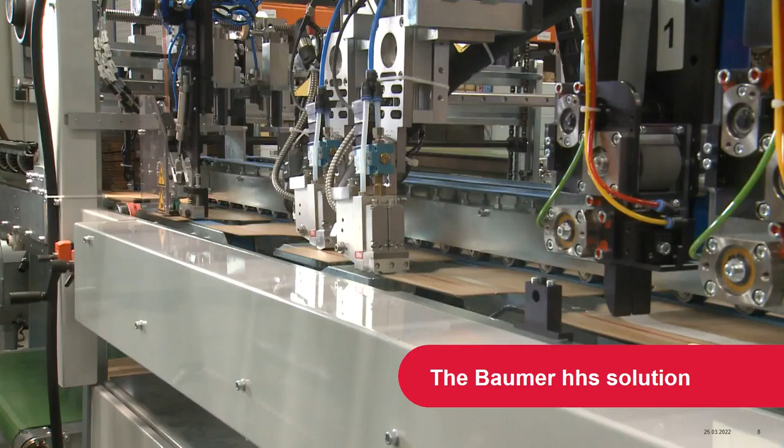These tools contribute significantly to a positive customer experience, and these tools also enable effective packaging of products at the shipper. So now you may ask, what does Baumer HHS contribute to this packaging solution? That's what the following minutes are about.

All the solutions shown are based on experience gained in a large number of installations over a number of years. Baumer HHS has not rested on its success, but has continuously developed the products on the basis of its experience. So now, I would like to present the results of these continuous developments to you.

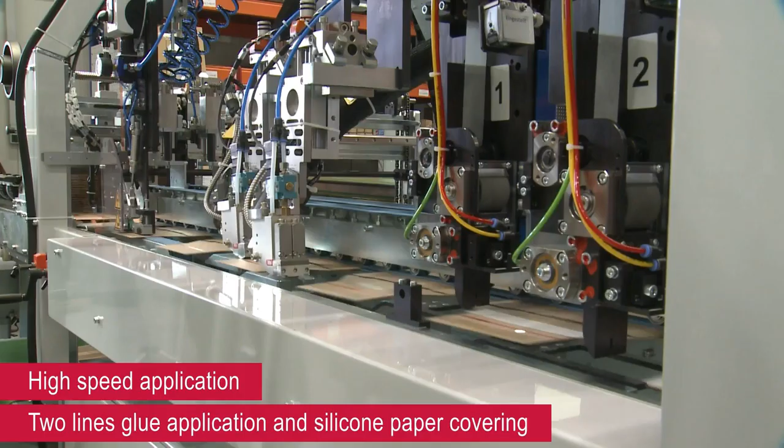We, as Baumer HHS, are the ones who apply the pressure-sensitive adhesive, as in this example of a high-speed application in which two pressure-sensitive adhesive strips are applied, which are then covered with a silicone strip by a partner company such as Enpro. Enpro will present the technology afterwards. Let's focus on the adhesive application for now.

The first innovation I would like to present to you is the new nozzle that has been tested in a wide range of series of tests. The aim of the development was to further improve the uniformity of the adhesive application. We have succeeded in this in an outstanding way. Adhesive application in contact application is uniform to a high degree across the width, even at high application weights.

We therefore call this new development the steady flow nozzle. Steady flow is a technical term from fluid dynamics. It means that the flow is stable and not turbulent. So, as we all know, stable conditions are the basis for the best results.

The second requirement that I would like to show you is that the nozzle can apply a high quantity of adhesive even at a high machine speed. The required application weights are typically between 250 grams per square meter and 500 grams per square meter. The contact application head of the e-commerce application can easily achieve this. This is achieved by optimizing the flow through the contact application valve and the two switching modules connected in parallel.

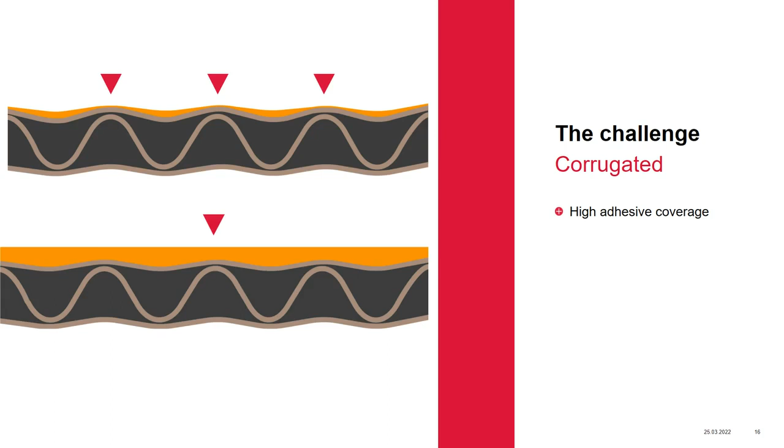So now the question is, what about substrates that have a flat surface, like shipping bags made of paper or flat folding cartons? It is obvious that less adhesive is needed here. In principle, you could also use the previously discussed solution, but this would be oversized and associated with unnecessary costs. In addition, the lower application weights offer further possibilities for optimizing the overall system. That is why Baumer HHS has a dedicated overall system for the paper and board application.

I may now present the heart of our new system, the patented HP 500C contact application valve. This valve is characterized by the snuff-back principle. For example, the valve closes against the flow direction of the adhesive. The associated advantage is that a negative pressure is created to pull back the material so as to achieve an excellent cut-off and prevent any dripping of the material.

The valve comes with a holder that allows precise adjustment to the substrate and due to its robustness maintains it during long production runs. An optional counter roller ensures that the substrate is pressed evenly against the nozzle mouth. The entire system is combined with a 25 kg melter that is matched to the required consumption quantities. The dedicated package, therefore, ensures excellent adhesive application at a significantly lower investment volume. The complete package is designed to be integrated directly into folder gluers or offline machines.

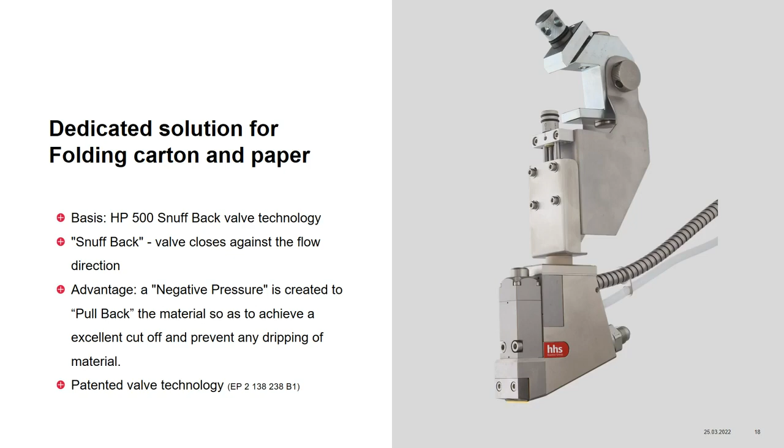Here you can see that even with difficult surfaces like this recycled cardboard, the application with the HP 500C succeeds in a very high quality. Now that I have shed enough light on the topic of e-commerce and the impact of Baumer HHS in this topic, we have now come to the end of my part in the webinar.

Now I would like to hand over to our partner, the company Enpro, who will give you exciting background information on the subject of silicone strip and tear thread application.

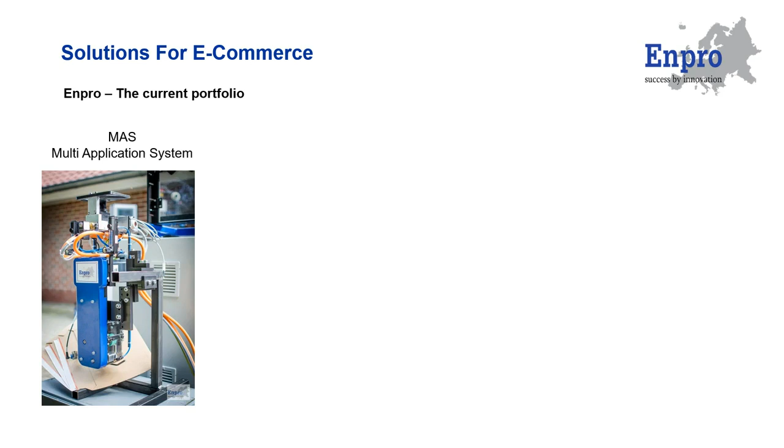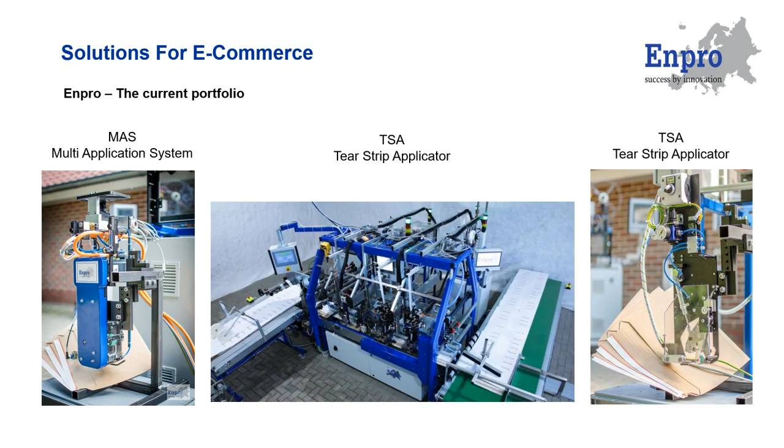And this is what Enpro is doing. The current portfolio shows a strong focus on e-commerce with applicators for silicone tape and for tear strips, both commonly working on folder gluers and on other host machines, or on our WTB angled belt conveyor. Introduced in 2021, the MAS multi-application system represents the second generation of applicators, so far mainly for silicone tape.

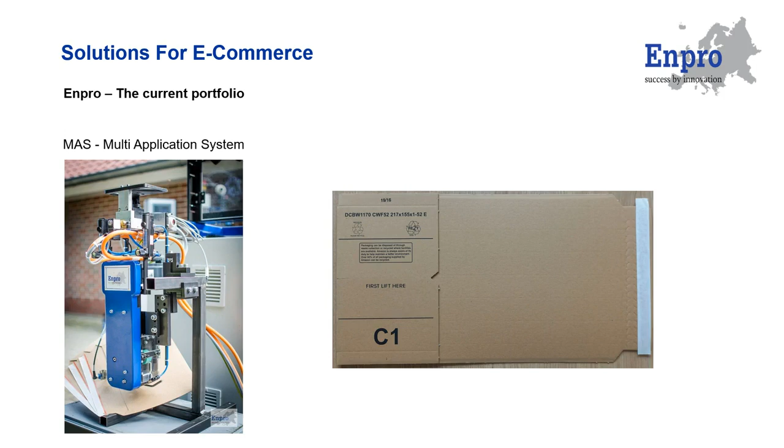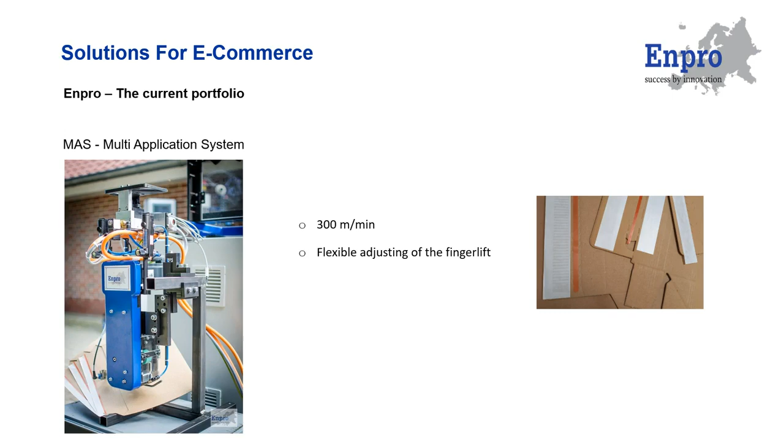The top speed is 300 meters per minute. The servo drive synchronizes with the speed of the product, allowing a flexible adjustment of the finger lift. As another benefit, the hot melt doesn't need to cool down a bit to actually transport the tape. The MAS can be used closer to the hot melt gun, less machine space is needed.

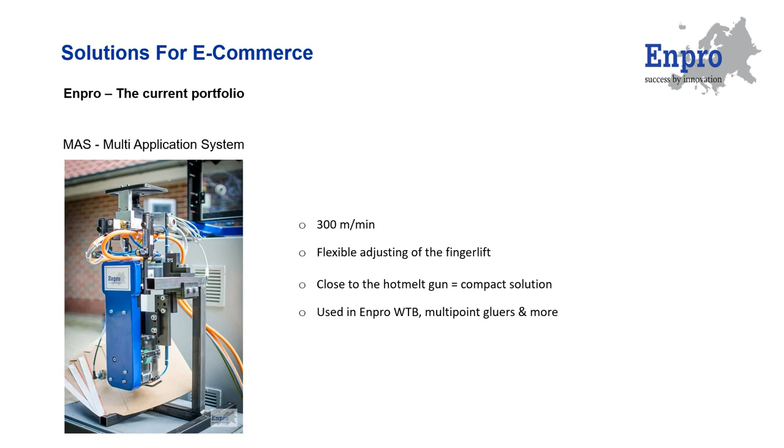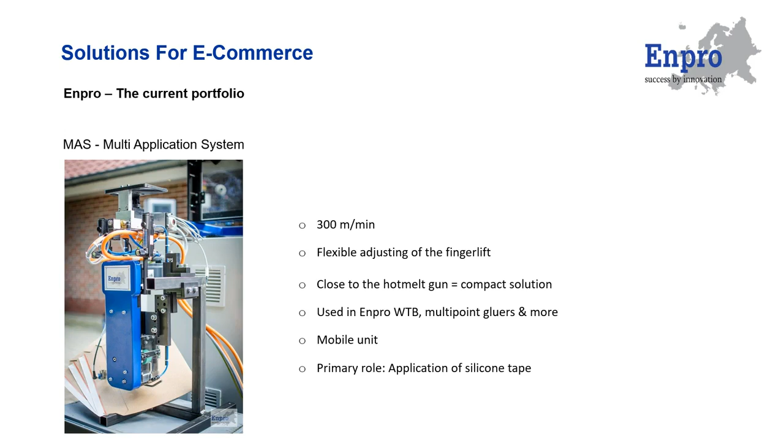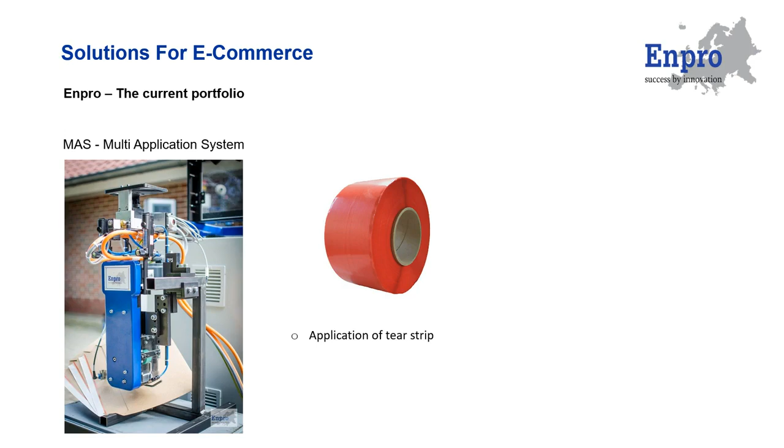The MAS is typically used in our WTB, in multi-point gluers, or on other host machines. Designed as a mobile unit, it can even be moved between different machines. The primary role of the MAS is the application of silicone tape. But it is also capable of applying tear strip, either the traditional red plastic version or tear strip made out of recyclable materials.

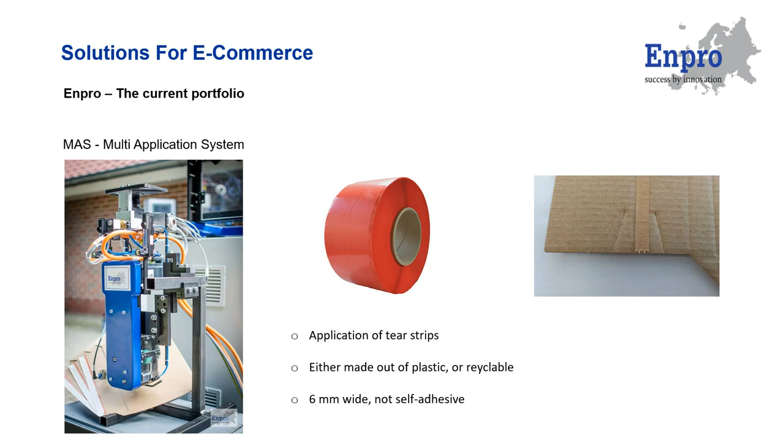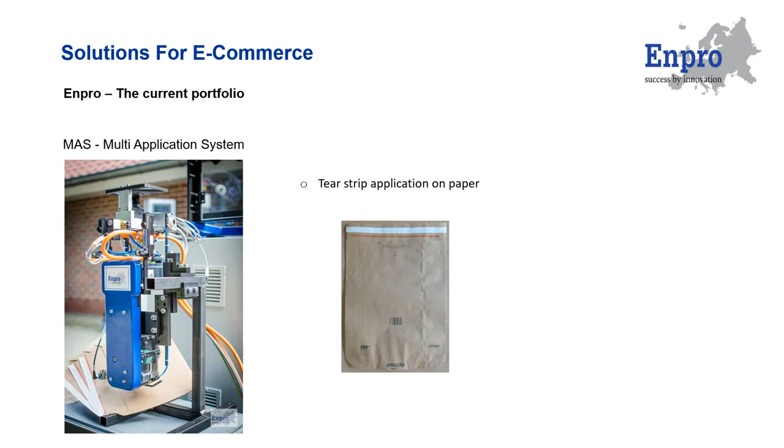Tear strips applied by the MAS are 6 mm wide, not self-adhesive, and require a very narrow hot melt coating line. The fact that the product is not touched during the application process opens the door for applying on paper. And of course also on solid board and on corrugated board. Another main advantage of using the MAS for tear strip application is the fact that production speed can now go up to 250 meters per minute.

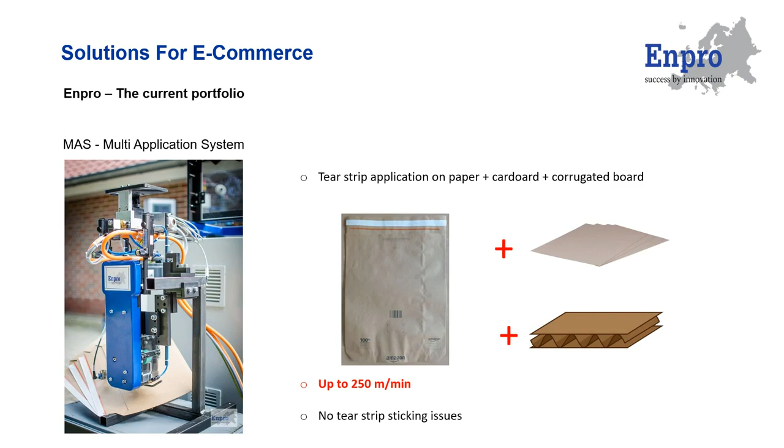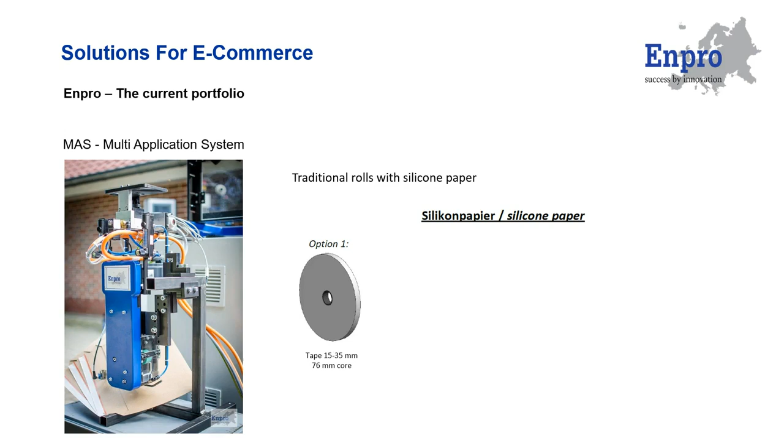Recently we often heard about sticking issues with the traditional self-adhesive tear strip on certain products. This should also be overcome by using hot melt. And here comes another benefit of the MAS. Silicone tape can be applied not only using the standard rolls, but also cross-wound spools in different versions, which can carry up to 7 times more tape. This reduces machine standstill dramatically for more net output.

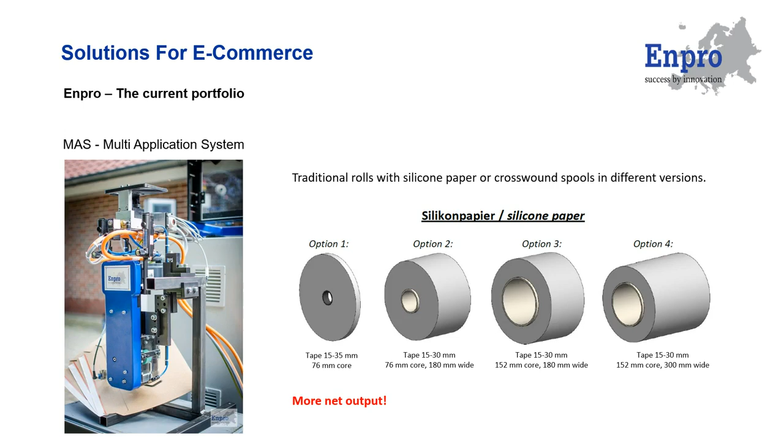Another way to reduce machine standstill is a splicer. We are also working on this solution. A prototype is being tested and it will be used for rolls and for cross-wound spools, which multiplies the time saving.

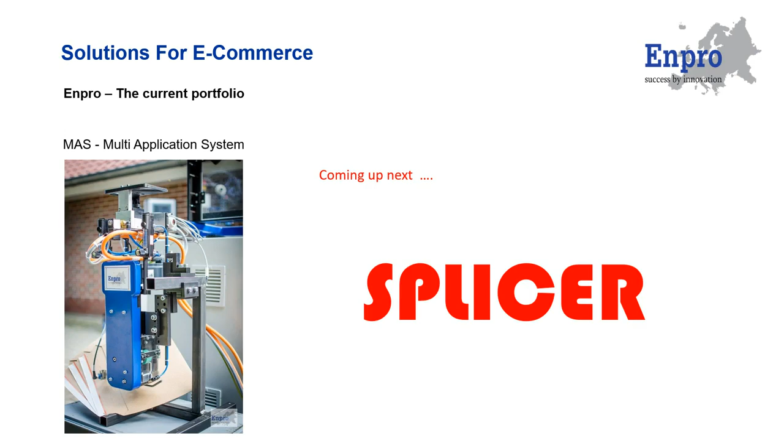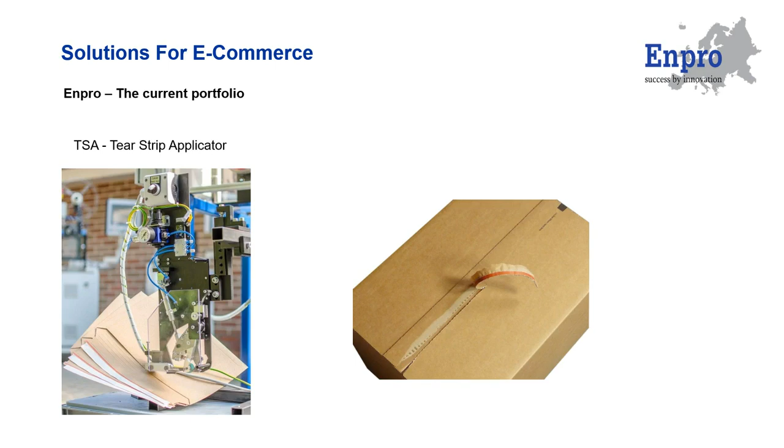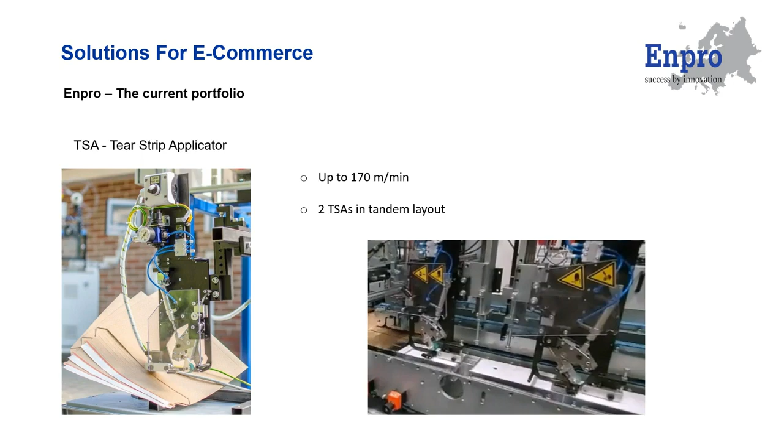Despite the tear strip capability of the MAS, we will keep our traditional TSA tear strip applicator in the product portfolio as a proven economical solution. Recently its production speed was increased from 140 to 170 meters per minute. And using it in a tandem layout can overcome the fact that it requires a minimum gap between two products. Result: more output at the same running speed.

Tape is always applied in machine running direction, but sometimes required in a 90 degrees angle, for example for lock bottom cartons. For such products we developed our WTB angled belt conveyor, which is available in 2 different sizes, as WTB 1000 and WTB 1500. Both can actually handle products which are slightly bigger than their name suggests. When thinking about the sizes, you should also have in mind that many products, like straight-line glued or lock bottom cartons, after being folded, will reach a WTB with half of their initial blank size.

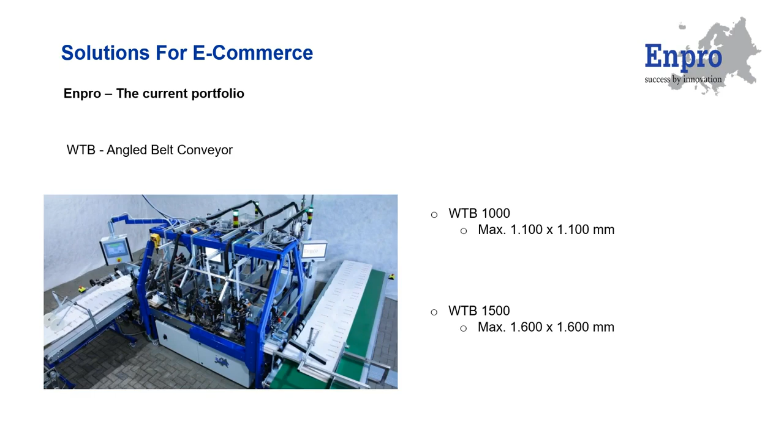The operating speed is up to 200 meters per minute. The products are aligned in the feeding process. And there is a micro adjustment for easy setting of all applicators, including the hot melt guns. The WTB can be used inline behind a folder gluer or separately as a standalone unit. The inline version can remain in its position even in case that products with no tape application are produced on the folder gluer.

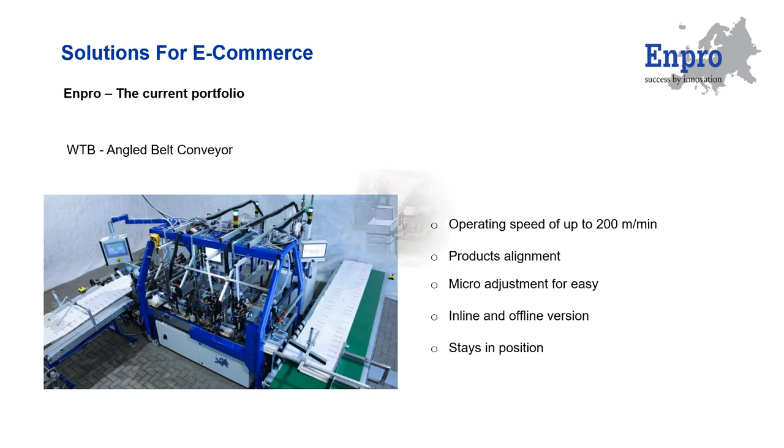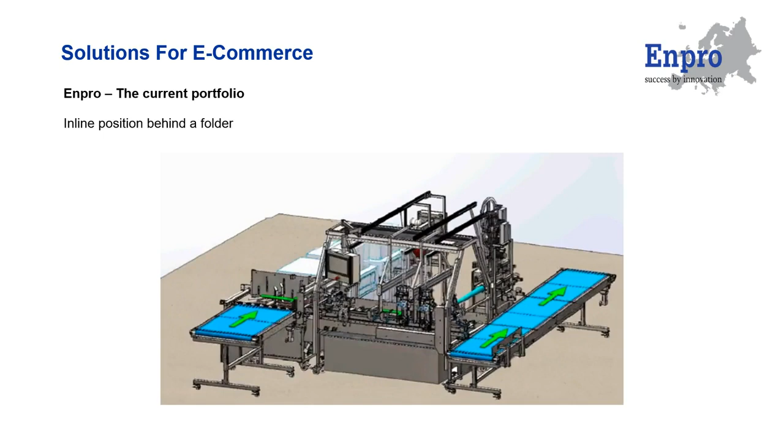The WTB is designed in a way that it can flexibly be integrated into the different production environments of our customers. With this very typical layout, the products arrive from the conveyor of the folder gluer on the left, change direction for the application process, to then proceed in the same direction like in the gluer. With such a layout, the overall width of the production line can often be reduced.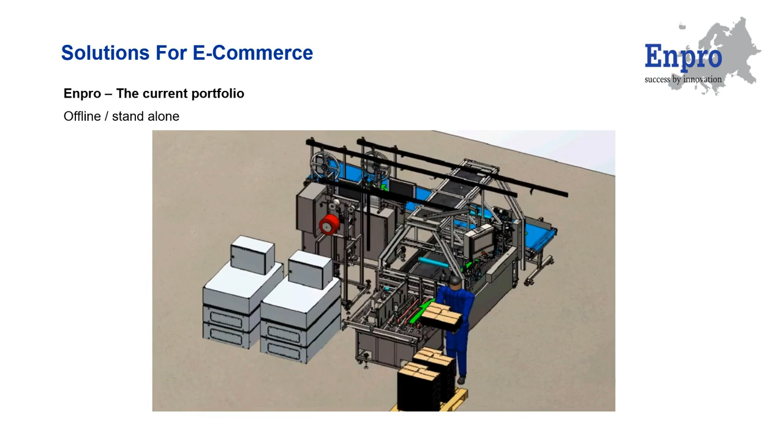Being in constant contact with our customers, we are always open to picking up their ideas. Here is an example of a customer who wants to benefit from the performance and high output of an inline working WTB, as visible in this sketch. But if needed, he wants to operate the WTB offline, while at the same time producing ordinary products on the gluer. With a well thought out positioning of the machines and the use of mobile conveyors, both is possible.

In case such a product redesign isn't possible, the so-called manual inline version would see somebody picking up the products from the machine conveyor to manually turn and feed them into the WTB.

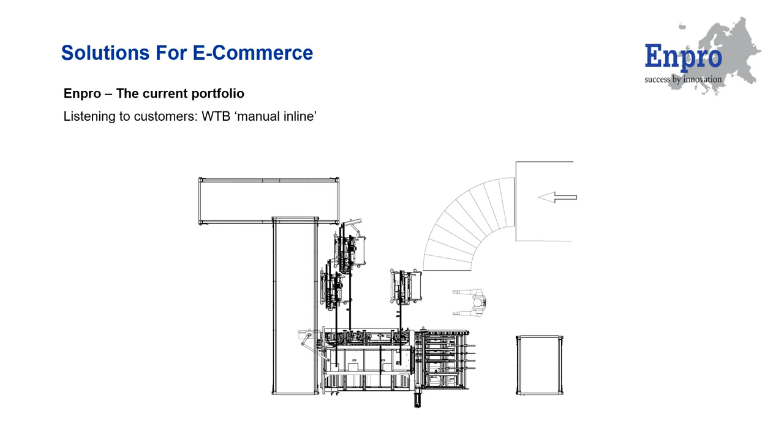But at Enpro, we do not only listen to our customers to develop products that meet their demands. We are also putting big effort in providing good service. Even though we are still a small company, we have established a 24/7 service. At any time, our customers can reach a service technician who will help them further. The use of modern tools like TeamViewer and data glasses helps us support our customers whenever needed.